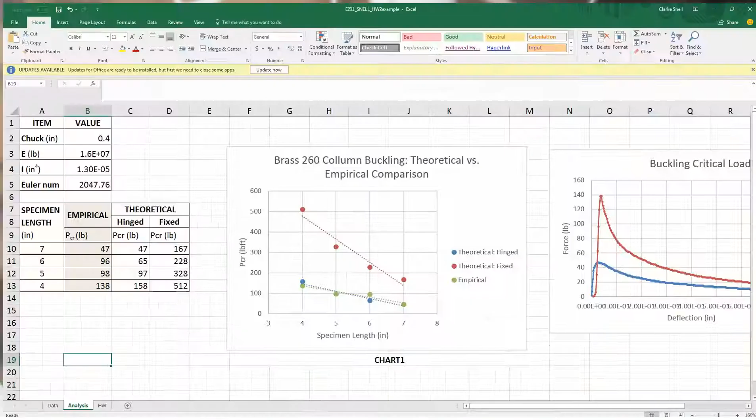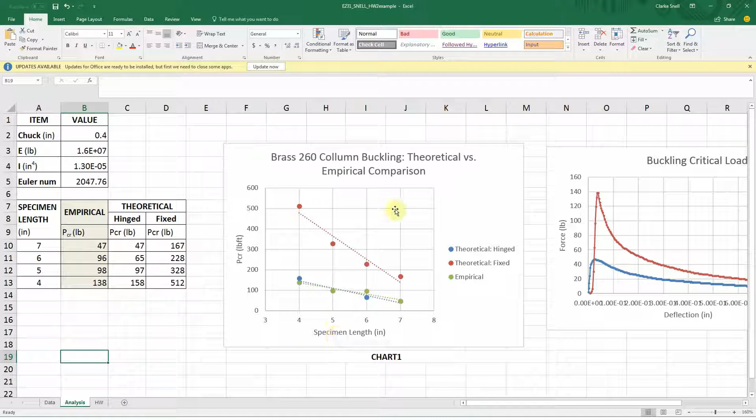We have our equation, our F max equals minus 35 times length plus 320. As we discussed in class, this comes from our empirical data that you all generated through experimentation earlier in the class, where we plotted force against specimen length. Nico has then taken all that data and created a trend line, which is what this formula is, and we put that in the truss analyzer. So therefore we have an experimentally derived strength for our material.

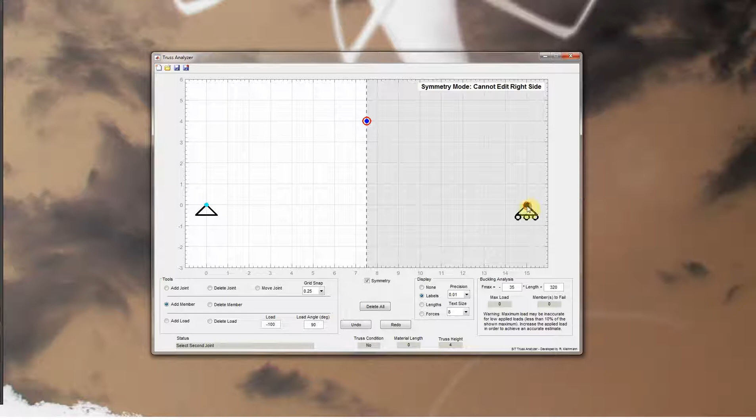Okay, so let's go ahead and make a very simple truss. I'm going to add a joint at 4 inches. Remember that we have a 15-inch long truss that can be up to 4 inches tall, so I'm just going to use those measurements as my limits. I'm going to add a couple of members here and make the simplest truss we can make, a triangle. And I'm going to apply a 100-pound load. I'm choosing 100 pounds because it's a simple number, and it'll make things simpler as we move forward if we're trying to compare trusses, for example.

First thing we notice is that our max load is pretty low, 21 pounds. There was some confusion in class that I was responsible for, so in addition to posting that announcement, let me point out again that this max load in the truss analyzer is the failure load for the truss. It has nothing to do with a specific member. So we see that we would fail at 21 pounds of force applied to the truss.

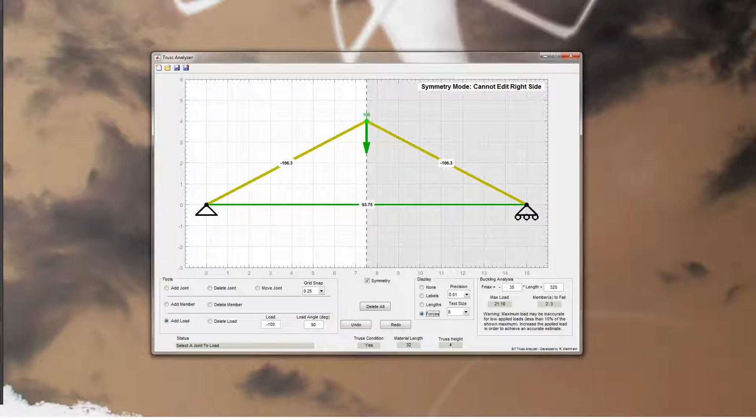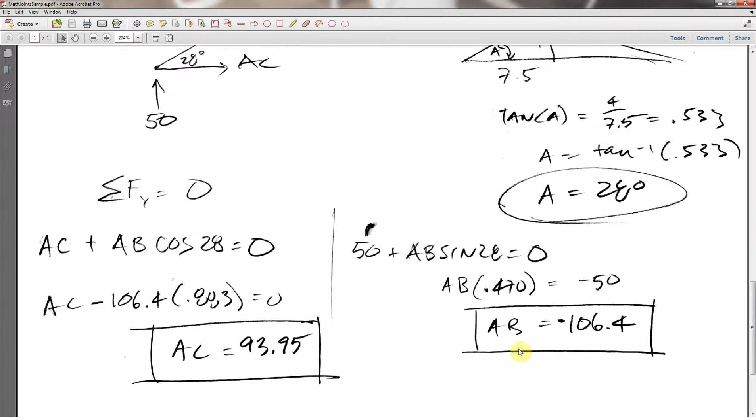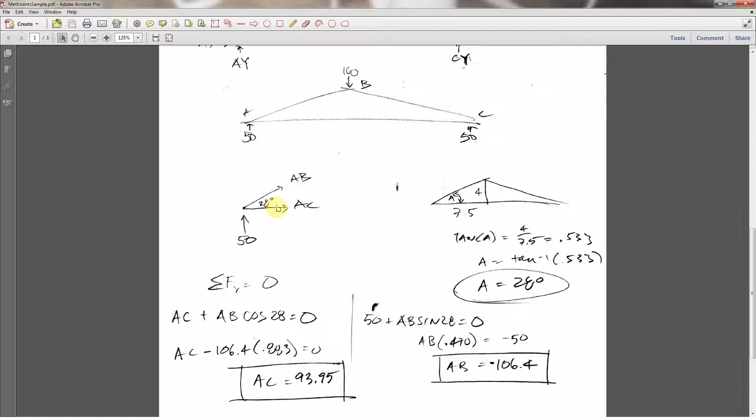Another interesting thing to notice is that these two members that are failing are actually taking more force than is being applied. That may seem like an error, but if you do the method of joints for this truss, which I won't go through, and I think you've started doing this in class, you can manually do what the truss analyzer does. Going through this process, we do get a negative 106.4 on member AB, and 93.95 in my case on member AC, which is almost identical to what we get in the truss analyzer, 106.3 and 93.75. I'm not sure why it's 7.5 instead of 9.5, but I think we can say it's close enough.

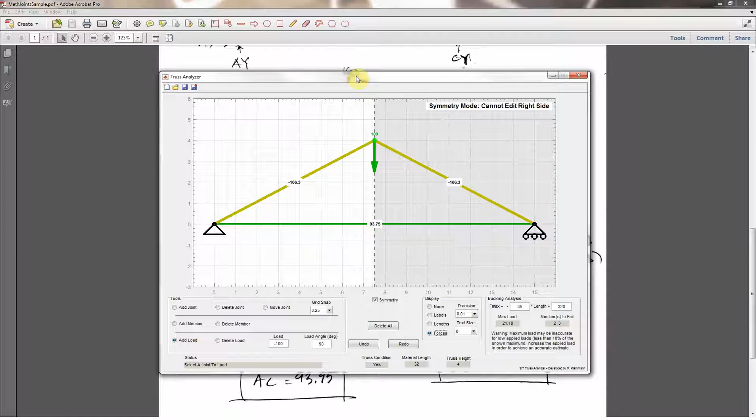So anything that we're doing with the truss analyzer, you could do with the method of joints and the method of sections. I think you should learn to do that, and you probably will in the other class, but that's not something we're doing in this class. All right, so let's play around with this truss. This is the thought process I would use if I were you, designing a truss with the truss analyzer as a tool, that's as strong as it can be using the least amount of material.

So let's mess around. I'm going to delete this member, though I probably don't need to. I'm going to add a joint here, and add some members. And we see that did nothing at all. This member in the middle is actually taking no force. The compressive force is still being taken completely by these two members. Something to point out is that if it's negative, it's in compression. If it's positive, it's in tension. If you look in your textbooks and study free body diagrams and these methods of calculation, you'll see why that's true.

Okay, but the reason I added this joint is that if these two members are going to fail, and they're failing because of their length, then if the force is the same, the shorter the members, or the more members we can get to take that force, the stronger the truss will be. So let's try something else. I'm going to turn off my labels so I can see this more clearly. One thing that bugs me about this truss analyzer program is it's hard to place joints. Oops. But they seem to work.

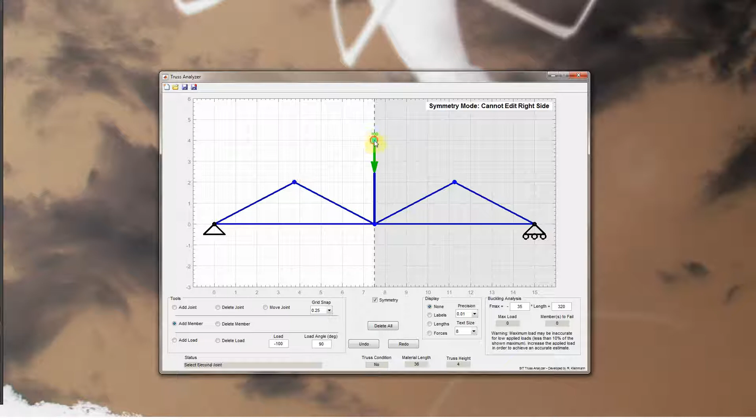And we see the result is that our max load is now at 161. So by simply breaking up this one member into 2 pieces, basically we now have 4 members taking that same load. So we've increased, I wouldn't say drastically, but we've increased from 25 or 21 pounds required to make the truss fail. We've increased it to 161 just with this simple move.

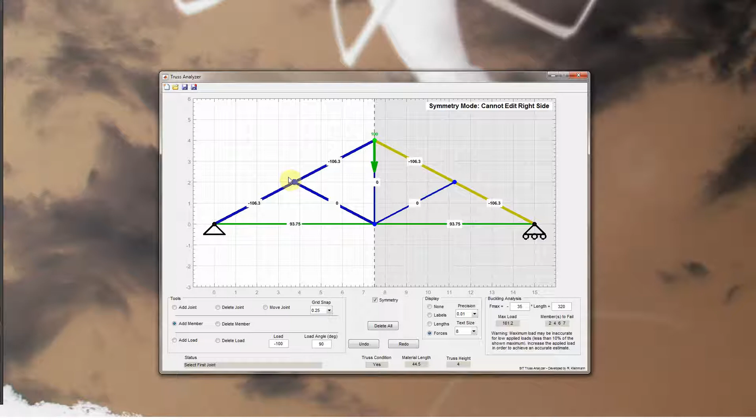So this is the kind of stuff that, if I were you, I would be doing to mess around with the Truss Analyzer. So what I would do now is I would try to apply this principle to other trusses I was designing and see if I can create a larger construction that takes the benefit of this approach. So let's look at another thing now.

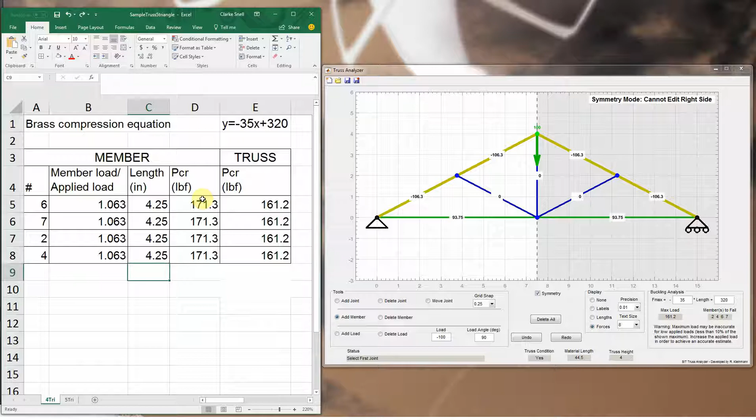We talked about keeping track of your data as you're designing these trusses, and this is a simple way of doing that. You could add more to what I'm doing here. We talked about this in class, but I didn't go over it in a way that was clear to everybody. Let me see what our member names are here. They may be different. No, it turns out the same. So I guess I made this in the same way as the one that I used to create this spreadsheet.

So this is a simple spreadsheet. I'm pulling information from the Truss Analyzer into this spreadsheet to keep track of this data and to make an analysis. So let's just look at it. We have our equation up here, y, which is the force, equals minus 35x plus 320. We have a column for all of the members that are in compression. If I look back at my Truss Analyzer, M6 and 7, M2 and M4, so those are here in this row. Then the second column is member load over applied load.

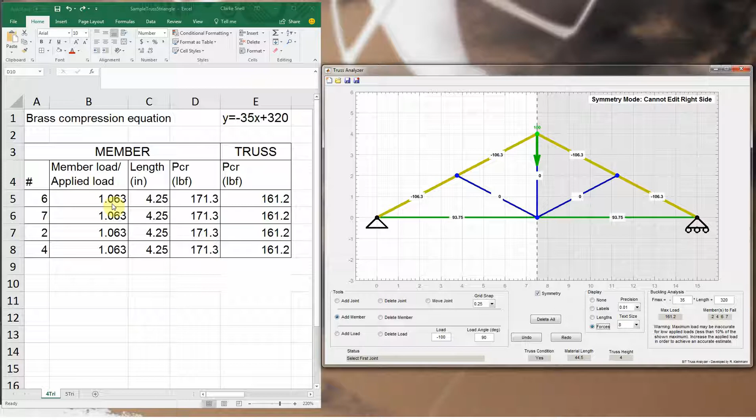And where I get that is from the forces: if I divide the member load, in this case for all of these members it's 106.3, by the applied load 100, I get this load factor. In this case, it's 1.063, and it's the same for all 4 members. I can also get my lengths from the Truss Analyzer, and again, with this simple truss, all of our members that are in compression are 4.25 inches long. So that's in this column.

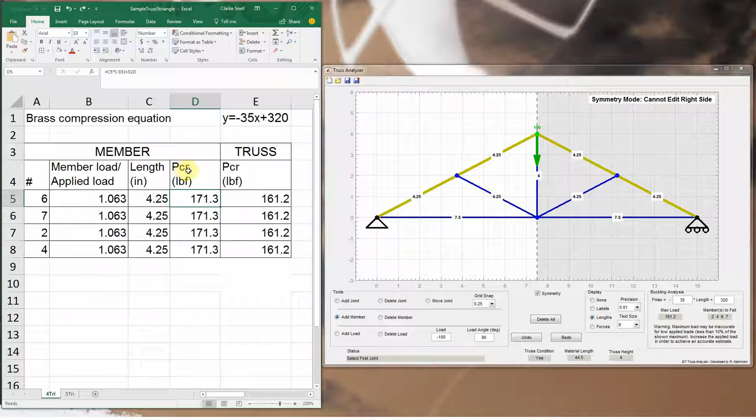And then I simply take our equation that we derived from our experiments and input our length into it to get, I guess you could call it, the pure compression critical buckling load for each of these members. Again, since they're all the same length and are taking the same load, the number is the same, 171.3.

Then, if I want to figure out at what point this truss is going to fail, I take this member load and divide it by the load ratio from column B2, and I look for the smallest number of all my compressive members. Whichever of my members fails first is going to tell me what the failure load for the truss is. So that's what we have here.